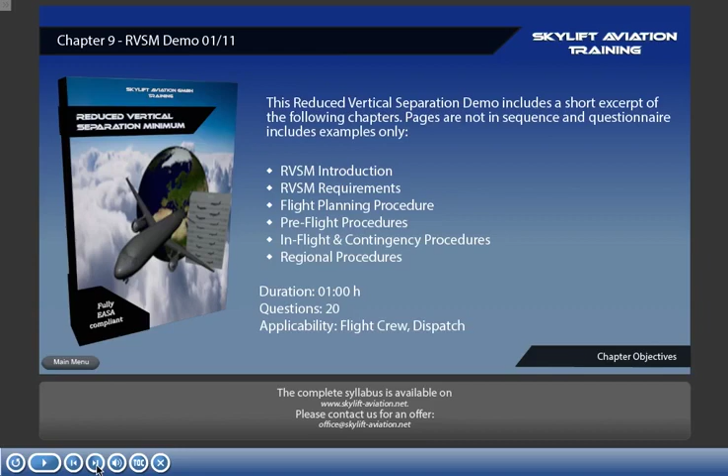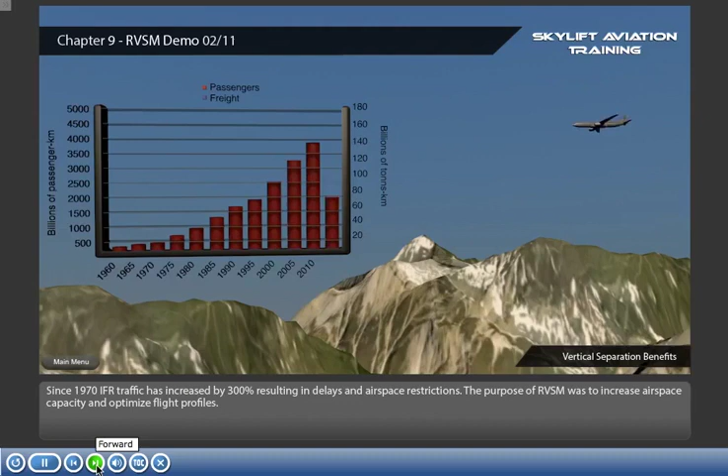Since 1970, IFR traffic has increased by 300%, resulting in delays and airspace restrictions. The purpose of RVSM was to increase airspace capacity and optimize flight profiles.

Route documentation with the specific requirements for the airspace intended to be used has to be developed. In addition, procedures and operational sequences have to be established to assure that dispatchers and flight crew receive all the necessary documents and briefing notes.

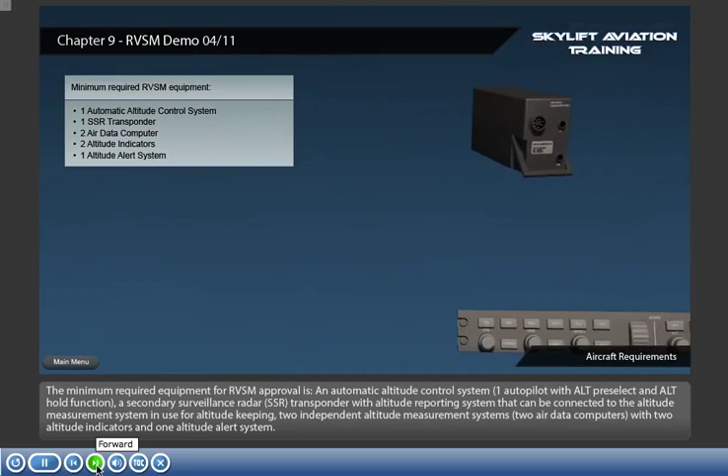The minimum required equipment for RVSM approval is an automatic altitude control system, one autopilot with Alt pre-select and Alt hold function, a secondary surveillance radar (SSR) transponder with altitude reporting system that can be connected to the altitude measurement system in use for altitude keeping, two independent altitude measurement systems, two air data computers, two altitude indicators, and one altitude alerting system.

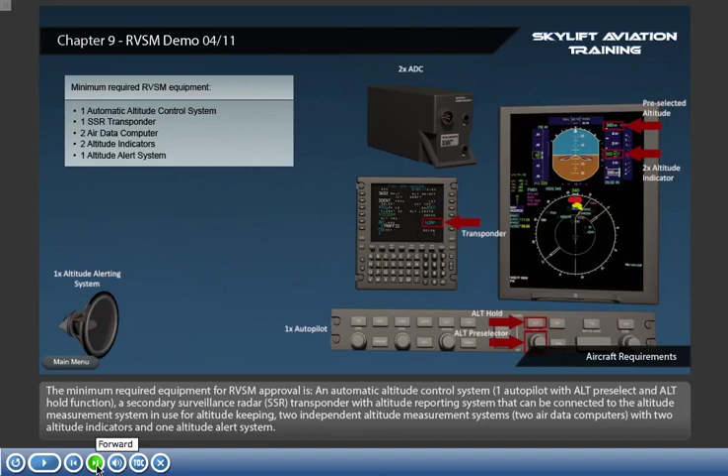When planning with the departure airport outside and the destination airport within lateral limits of RVSM airspace, the aircraft has to descend below flight level 290 using the transition airspace before reaching RVSM airspace.

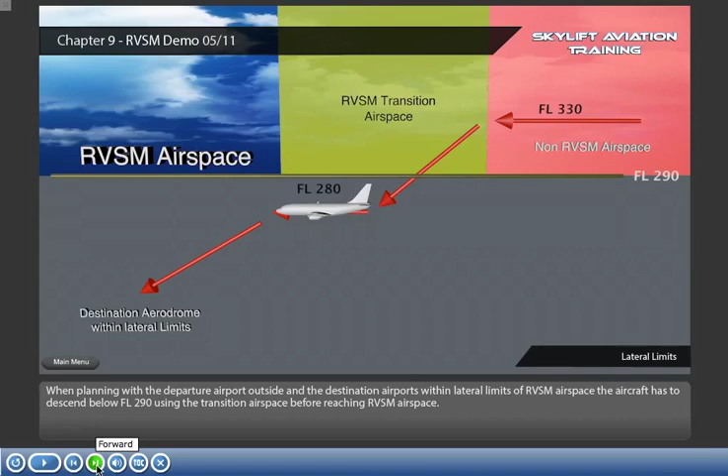One automatic altitude control system must be engaged during flight within RVSM airspace. This ensures that the aircraft will stay within plus or minus 65 feet as per requirement.

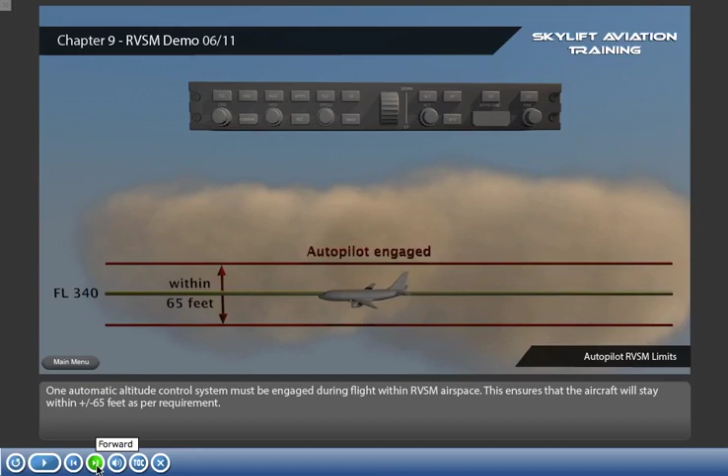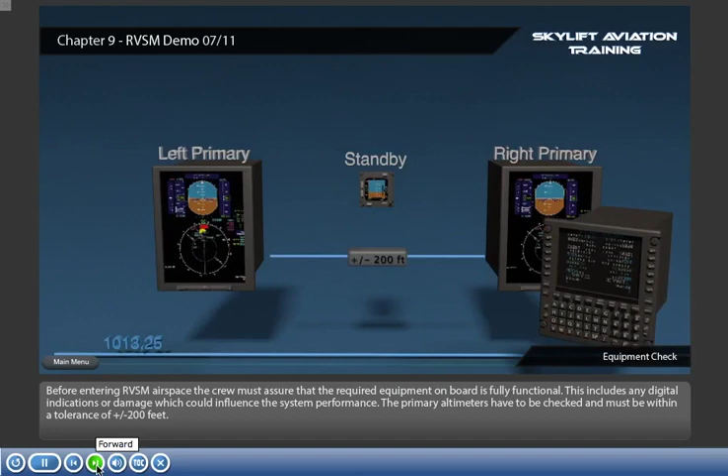Before entering RVSM airspace, the crew must assure that the required equipment on board is fully functional. This includes checking for any digital indications or damage which could influence system performance. The primary altimeters have to be checked and must be within a tolerance of plus or minus 200 feet.

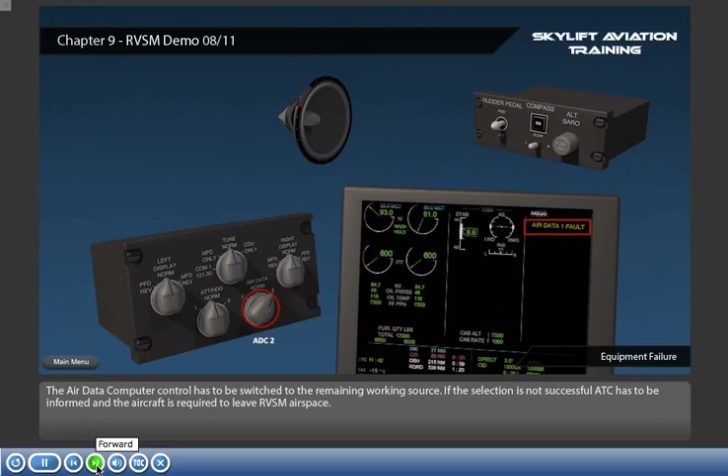The air data computer control has to be switched to the remaining working source. If the selection is not successful, ATC has to be informed and the aircraft is required to leave RVSM airspace.

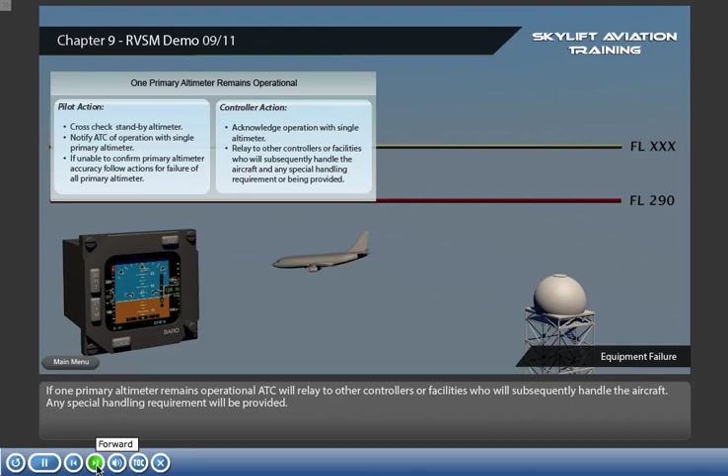If one primary altimeter remains operational, ATC will relay to other controllers or facilities who will subsequently handle the aircraft. Any special handling requirement will be provided.